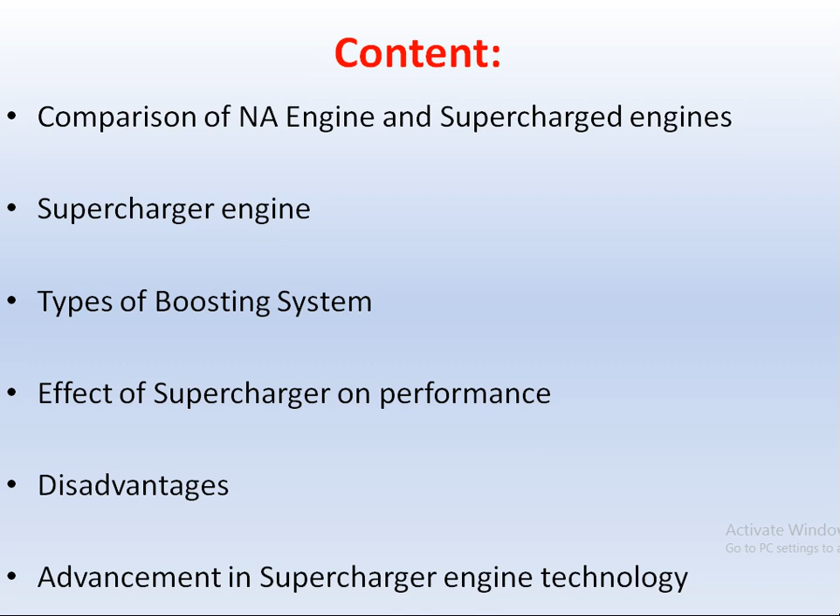Basically, there are two types of engines. First is the naturally aspirated engine, in which the air or charge enters the engine cylinder at atmospheric pressure during the suction stroke. This means the inlet air pressure is equal to 1 bar.

The second type of engine is called supercharged or turbocharged engine, in which the air or charge enters the engine cylinder above atmospheric pressure during the suction stroke. That pressure may be 1.5 bar, 2 bar, or 2.5 bar. It depends upon the requirement and the design of the engine.

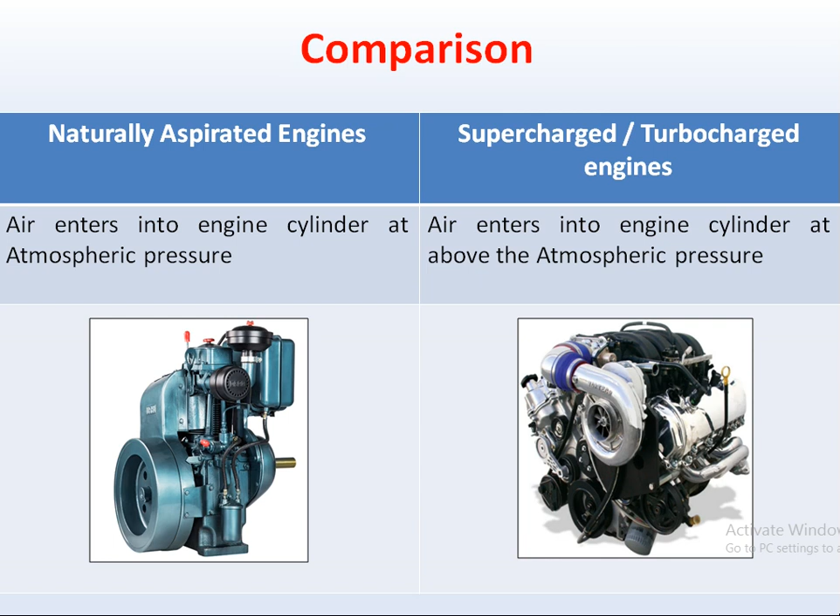So power output of the engine depends on the following factors. The first is the quantity of air inducted into the engine cylinder and the extent of utilization of the inducted air. Meaning, the amount of air entering the engine cylinder, and after entering, how it is utilized.

If this is proper, smoother combustion takes place, and due to this the power output of the engine increases. It also depends upon the inlet conditions of the charge, like temperature and pressure. These are very important parameters. If temperature and pressure are higher, it's going to affect the combustion.

It depends upon the speed of the engine, since power equals 2 pi N T by 60. N is the speed of the engine, always measured in revolutions per minute, so we can say power is directly proportional to speed.

It also depends upon the quantity of fuel admitted and the combustion characteristics of the fuel. At a proper loading condition and proper speed, the proper amount of fuel needs to enter the engine cylinder, and that fuel must have a better calorific value. If the calorific value of the fuel is higher, more energy is evolved by the fuel, and power output is going to increase.

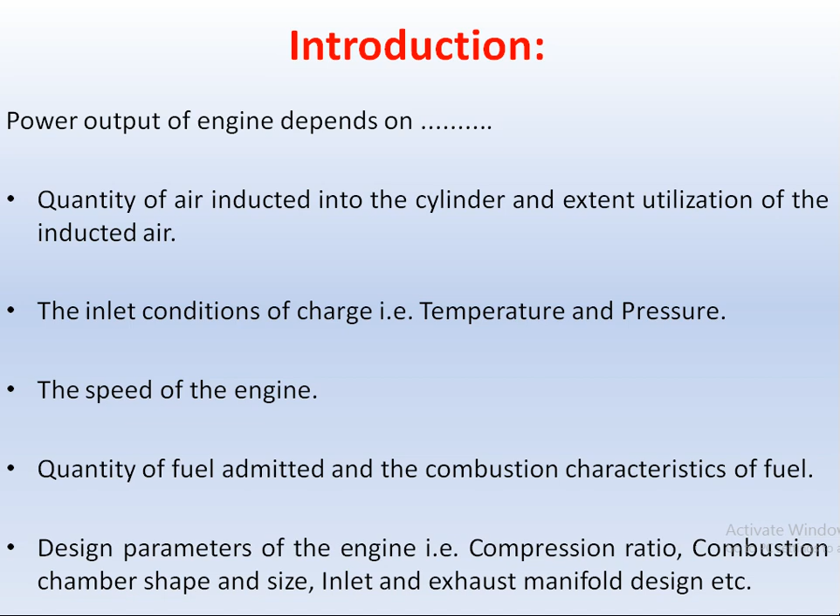It also depends upon the design parameters of the engine, like the compression ratio, combustion chamber shape and size, and the inlet and exhaust manifold design.

So why is there a need for boosting, for increasing the pressure of the inlet air, or we can say why there is a need for supercharging or turbocharging? To raise the density of the air charge, there is a need for the boosting system, a need for supercharging. By compressing the inlet air, the pressure of the air increases, and the density of the air increases.

Due to this, the volumetric efficiency of the engine increases. If volumetric efficiency improves, complete and smoother combustion takes place, and due to this, the power output of the engine increases. So we can say, to increase the power output of the engine, there is a need for the boosting system, a need for supercharging or turbocharging technology.

To improve the better torque characteristic over the whole speed range, meaning more torque from lower RPM to higher RPM, there is a need for supercharger technology. To improve all the efficiencies of the engine, like thermal efficiency, volumetric efficiency, and mechanical efficiency, there is a need for supercharging.

To improve the acceleration of the vehicle and for better scavenging of the products—scavenging meaning removal of exhaust gases to the atmosphere during the exhaust stroke—if this is proper, it will not create the problem of exhaust gas dilution. Otherwise, the exhaust gases trapped inside the engine cylinder will create problems for the next cycle.

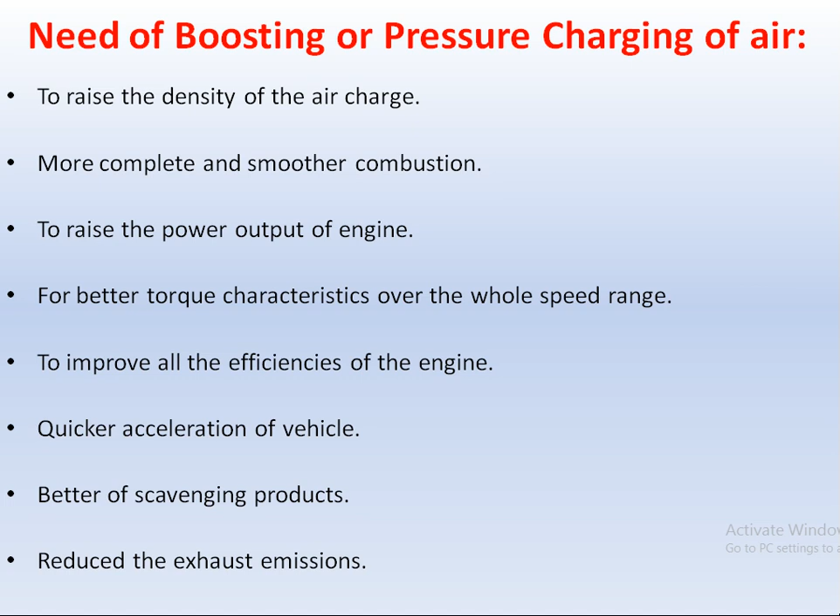The compressor wheel is available, and this compressor wheel is directly connected with the crankshaft. Again, I am repeating, in a supercharger engine, this compressor wheel is directly connected with the engine crankshaft. So we can say the supercharger is an engine-driven air pump that supplies more than the normal amount of pressurized air into the intake manifold.

The raising of the air pressure is done by the engine-driven compressor. So, for compressing the inlet air, a certain percentage of the engine power is consumed.

But how much is the pressure going to raise with this technology? The boosting air pressure is from 1.5 bar to 2.5 bar. It may go up to 3 bar.

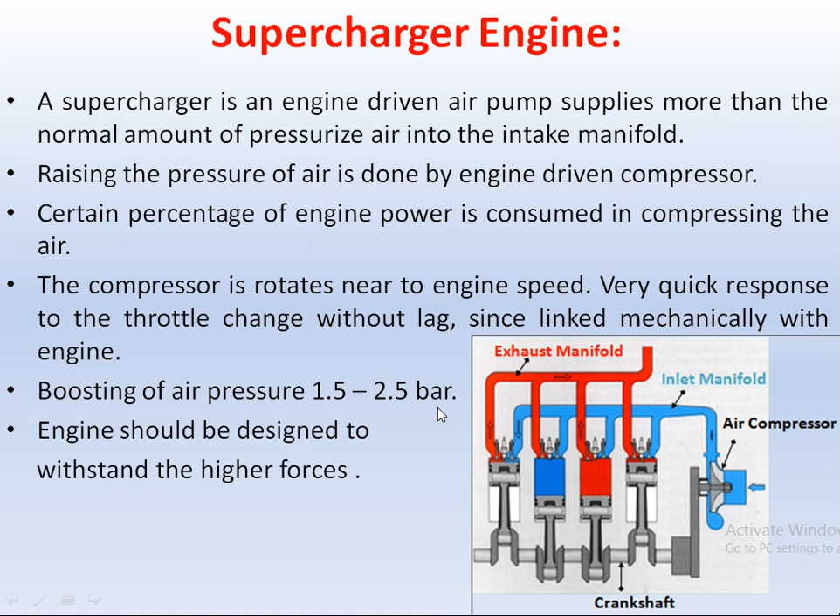The next thing is the types of boosting devices, or the types of superchargers used in the intake manifold. That is nothing but the compressors.

This is the most efficient device, commonly used both in supercharger and turbocharger technology. It is light in weight. It can raise the pressure from 1.5 bar to 3 bar. However, it has a certain problem of supplying air into the engine cylinder — an unstable supply of air into the engine cylinder.

The second boosting device, the second supercharger, is the Roots type. It consists of two root lobes which rotate in opposite directions. This device can be manufactured at a lower cost, but it has a lower efficiency.

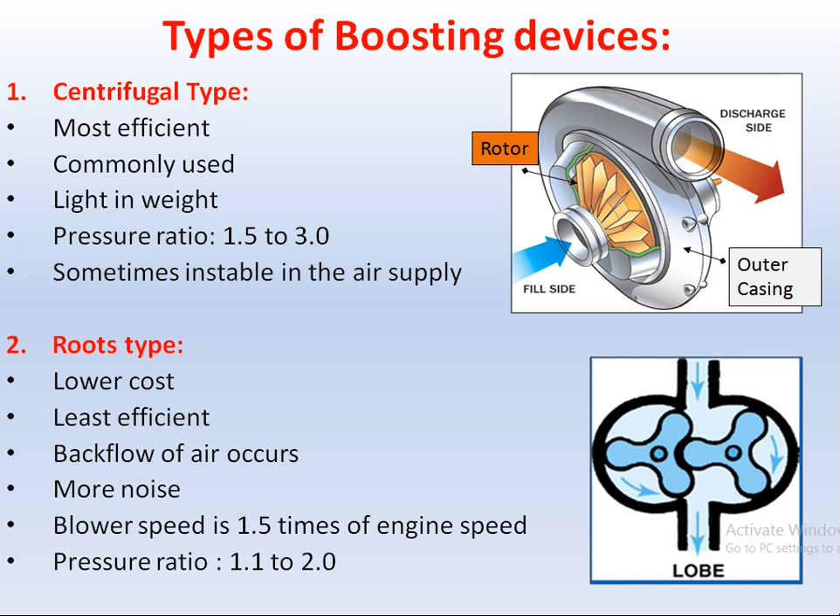The resistance to the flow of inlet air is higher, so backflow of the air takes place, and more noise is produced from this device. But it can raise the pressure from 1.1 bar to 2 bar.

The third boosting device is the screw type, consisting of two screws which rotate in opposite directions. It has more efficiency, but it requires more cost for manufacturing. It can raise the pressure from 1.5 bar to 3 bar, and produces less noise, with no backflow of air.

So in supercharger as well as turbocharger technology, mostly the centrifugal type and the screw type superchargers are used — screw type and centrifugal type boosting devices.

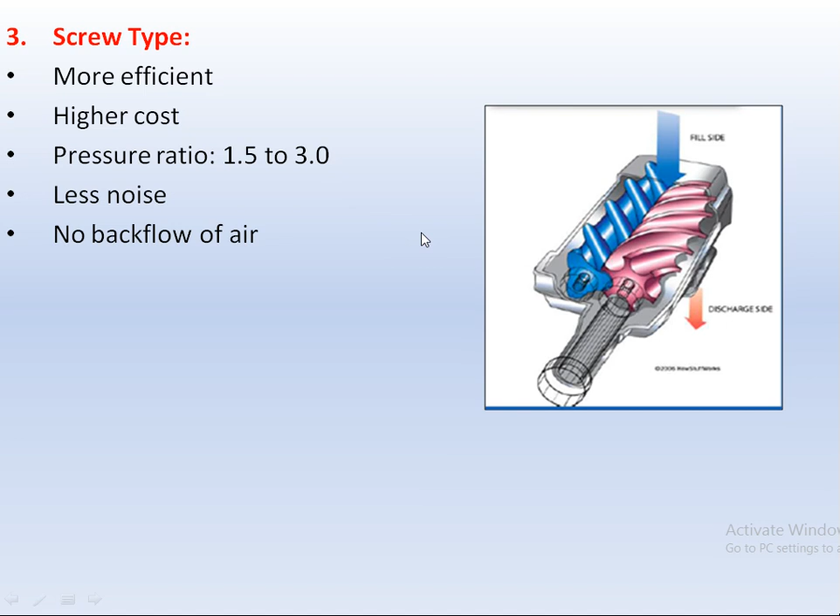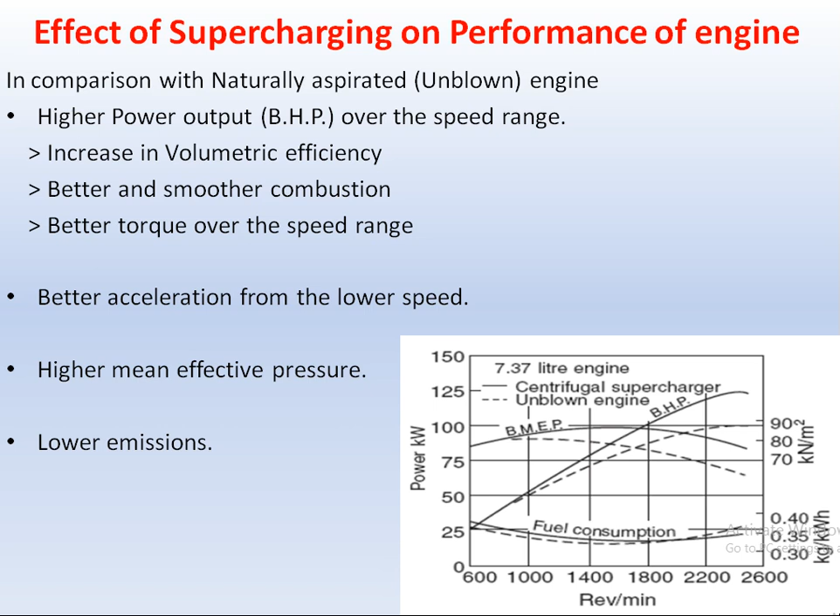It is having certain disadvantages. Increase in the pressure definitely increases the temperature of the inlet air, or we can say it increases the temperature of the inlet charge.

In case of the spark ignition engine, because of the increase in inlet air temperature, the ignition lag period of the end charge may decrease, and it may create detonation, which is undesirable in the SI engine. So if you are using this technology, the fuel used must have better anti-knock characteristics, meaning the octane number as well as the cetane number of the fuel should be as high as possible.

Similarly, increase in the pressure and temperature of the inlet air increases thermal stresses, so over time it can damage the engine components, as well as the gas loading inside the engine cylinder is going to increase, and the cooling system should be properly tuned.

One more disadvantage is higher specific fuel consumption. Since the compressor is run by the engine crankshaft, it consumes engine power, so the specific fuel consumption is going to increase. And since more components are available in the engine, the weight of the engine is higher, and the noise produced from the engine is again higher.

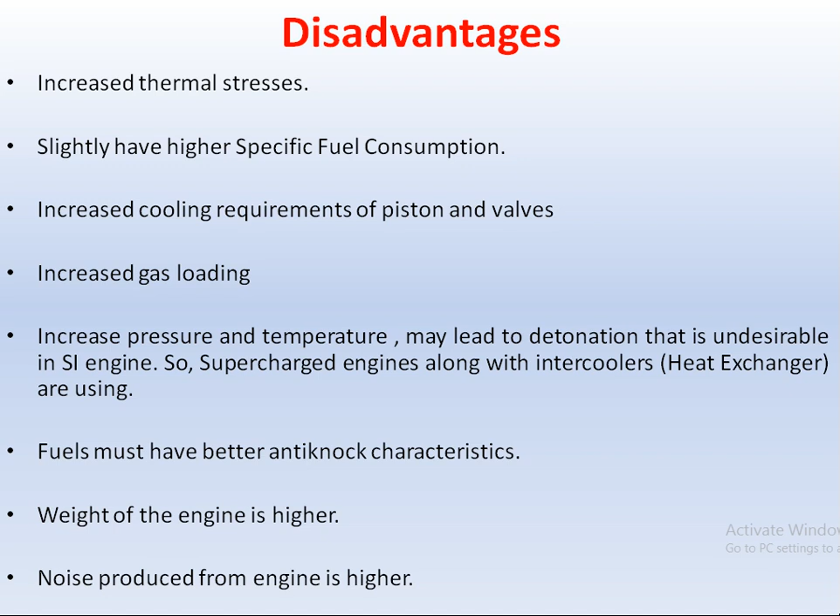So to overcome these problems, there is an advancement in supercharger engines. The first one is called supercharger with boost control technology. Many superchargers are equipped with a bypass valve that allows intake air to flow directly into the engine cylinder, bypassing the supercharger. As you know, at every loading condition and every speed, the pressure requirement inside the engine cylinder is different.

But in conventional supercharger engines, at any loading condition, the inlet pressure after compression is the same. This can create problems, it can increase thermal stresses, it can increase gas loading, and over time it can damage the engine components. So there is definitely a need to control the pressure of the inlet air with respect to loading condition and speed.

That is what is done using the supercharger with boost control technology. In the figure, this boost control valve is shown in the intake manifold, that is the bypass valve, and this is the supercharger, the boosting device. So what happens at a particular loading condition?

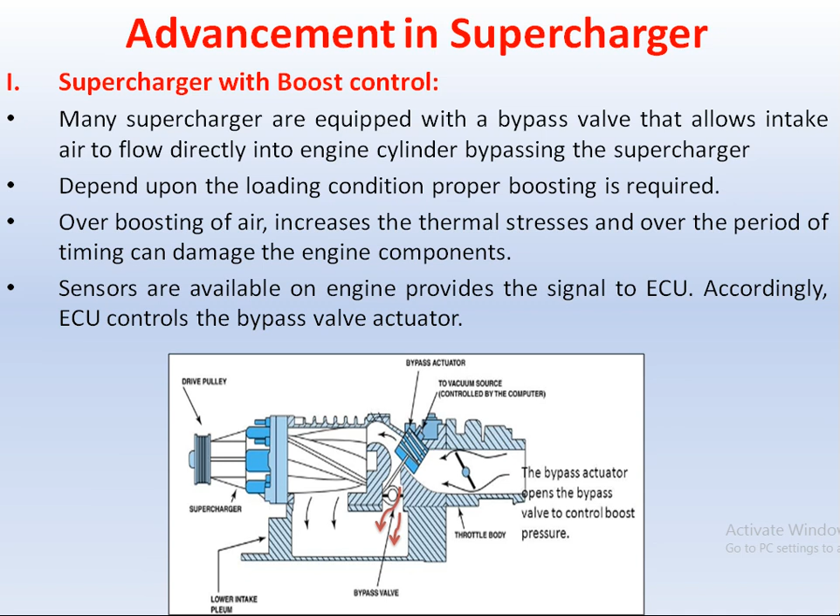The second problem with the technology is that increase in pressure and temperature may lead to detonation, as we already discussed, which is undesirable in SI engines, but increase in inlet pressure and temperature is desirable in CI engines, as it may reduce knocking.

But if you consider the other case, increase in the temperature of the inlet air reduces the density of the air, it is inversely proportional. So the volumetric efficiency is going to reduce, and if volumetric efficiency reduces, then proper combustion will not take place inside the engine cylinder.

So to avoid this problem, superchargers with intercoolers are used, and these intercoolers are mounted after the boosting device, or we can say mounted in between the engine cylinder and the boosting device. This intercooler is nothing but a heat exchanger that will reduce the inlet air temperature, cool the air, and send cool air into the engine cylinder.

So definitely a certain pressure drop will take place, but the volumetric efficiency remains constant. If volumetric efficiency remains constant, or increases, then combustion improves. If combustion is proper, the power of the engine will be higher, the torque of the engine will be higher, and lower emissions will be produced from the vehicle.